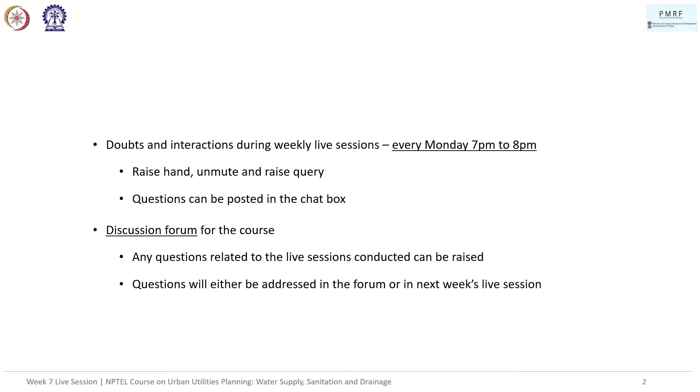So week 7 primarily dealt with sanitation and drainage fundamentals. Let's have a short recap. The first two lectures focused on the basics of sanitation. We covered concepts like basic terms, key issues, the purpose of sewage collection, conveyance and disposal, sewage treatment and responsibilities, sewage project planning, city sanitation planning, sanitation and health, and data and service prerequisites for starting sanitation planning.

Then the next three lectures went on to sewage systems. We covered on-site sanitation systems primarily, including pour-flush water seal latrines, leach pits, septic tanks, secondary treatment and disposal of effluents, upflow anaerobic filter, aqua privies, package septic tank, advanced systems, septage, and cesspools, chemical toilets, and night soil digesters.

We also covered the basics of decentralized sewage systems, including simplified sewerage, small bore sewer system, shallow sewer system, decentralized wastewater treatment system, normally abbreviated as DEWATS, and secondary treatment and disposal of effluents. We also saw a short introduction about public toilets, community toilets, and slum sanitation.

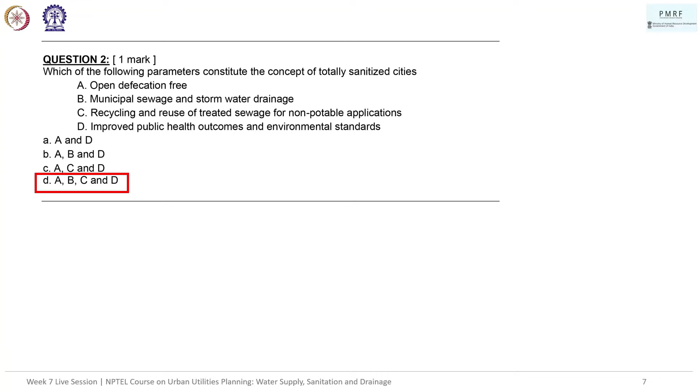So moving on to the next question. This is again almost directly lifted from the slide, if you ask me. Open defecation free cities involve access to safe sanitation and waste disposal facilities for households. So, A disposal, B collection, C management, D treatment.

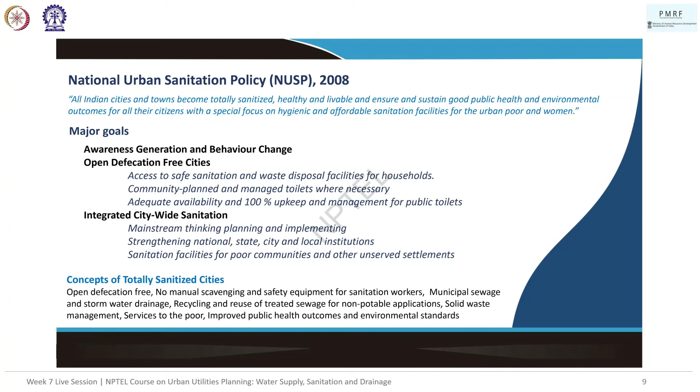Any answers? Okay, we have one answer in the chat box. A, disposal. Correct, so you are absolutely right, Mr. Ashwin. So open defecation free cities are actually focused on access to safe sanitation and waste disposal facility. So particularly focused on disposal, right?

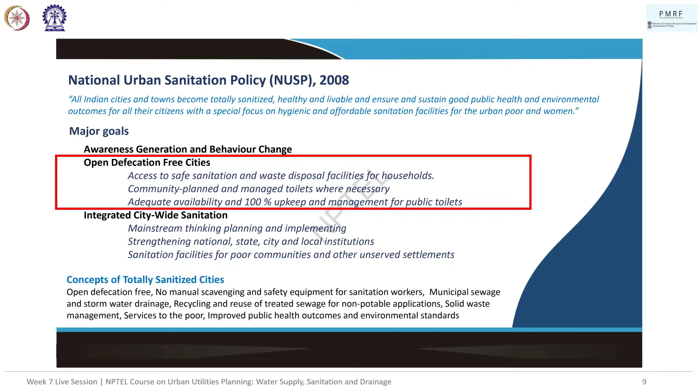Because essentially open defecation happens because of two things. One, not just the access part, but also the lack of disposal facilities at the household level. I know of households next to my own house who choose to open defecate if possible, which is quite sad. We live near the coast, and they do it only because they don't want their septic tanks filled. If the septic tank fills up, the collection means you'll have to pay for the sewage tanker that is coming in. Therefore, just because they can't dispose of the waste from their septic tanks, they actually choose to open defecate at least partially. So therefore, that is why this component of disposal is particularly added at the household level, right? So that's our answer, A, disposal.

Any questions, any queries? I hope not. These are directly from the slides.

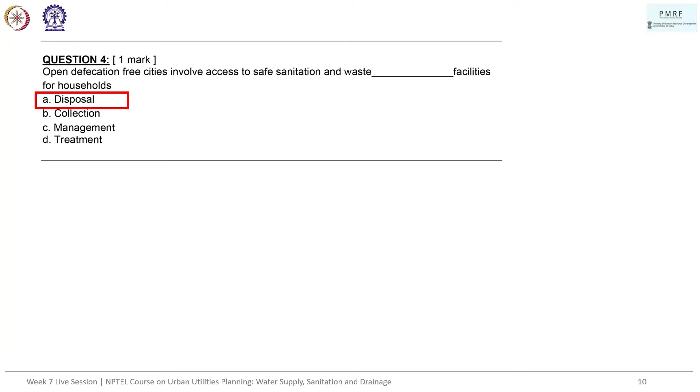All right, moving on. Match the following organizations with its responsibility concerning sewerage and sewage treatment. These are also actually given directly in the slide. If you notice, the Ministry of Housing and Urban Affairs essentially formulates policies and provides technical assistance to the states and ULBs. So, originally, sanitation does not come under the central list.

If you remember, we spoke about the three lists, central, state, and concurrent lists, which are part of the constitution. After the 74th Amendment Act, it has primarily become the purview of local bodies, especially when it comes to urban sanitation. Rural sanitation is still probably under the wing of states, because rural sanitation is a very localized problem. But centralization of sanitation at the city level is something that is very much required. Therefore, urban local bodies have been heavily involved in the execution or the implementation part of sanitation policies.

The formulation of these policies and the provision of technical assistance comes from the Ministry of Housing and Urban Affairs, which is part of the Government of India.

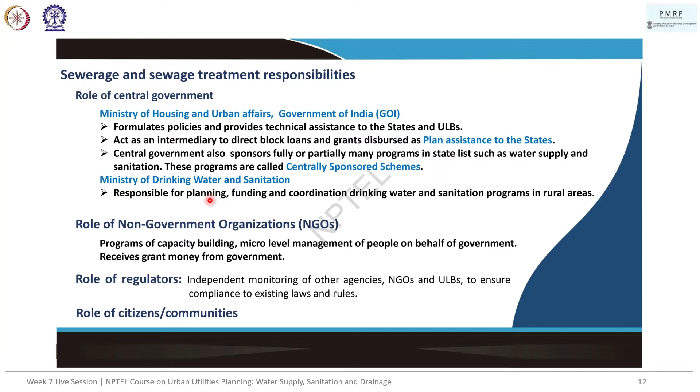Regulators are essentially independent monitoring agencies that look over other agencies, NGOs, and urban local bodies. They act as neutral and unbiased estimators of implementation of sanitation plans, so they basically look after compliance to existing laws and rules. Matching all of these, we get option A.

When it comes to NGOs, there are an extremely high number who actually work on sanitation and access to sanitation. There are very particular niche areas also being addressed. For example, there is this organization, Right to Pee, in Mumbai.

I got to meet one of their key members. Their focus is all on ensuring sanitary facilities are available for women in slums. So such niche areas are also being taken up by non-government organizations. Collectively, all kinds of issues are hopefully addressed.

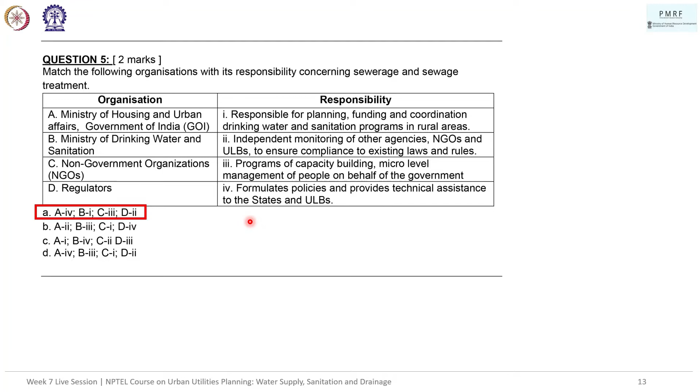Next question: the infiltration area required for infiltration of the waste liquids in the leach pit is given by what? Options are: total flow in pit every hour divided by infiltration rate; total flow in pit every day divided by infiltration rate; total flow in pit every hour divided by sludge accumulation rate; and total flow in pit every day divided by sludge accumulation rate. Any answers?

It's B. Okay, anybody else? One more answer, yes, B. The answer is actually B.

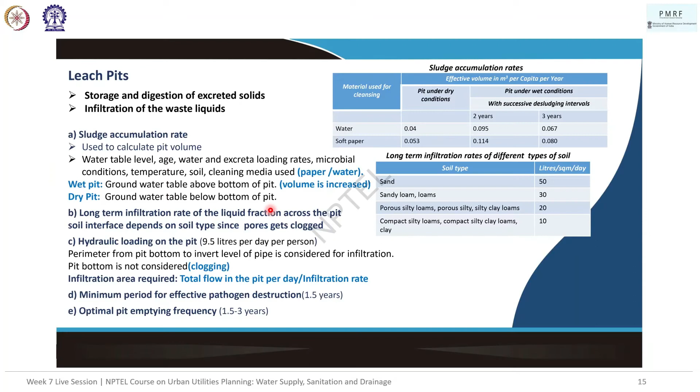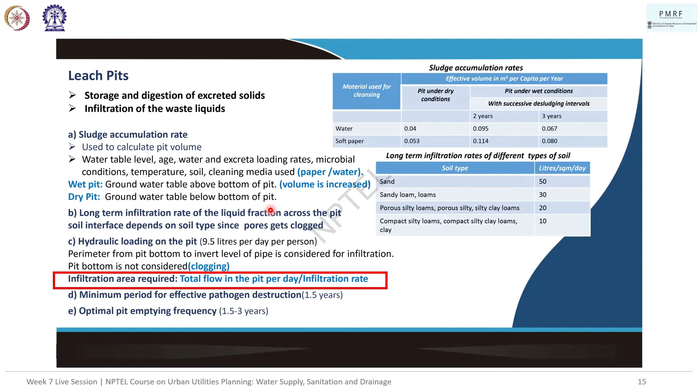If you remember from the slides, the infiltration area required when we're talking about leach pits is the total flow in the pit per day divided by infiltration rate. So the answer is B.

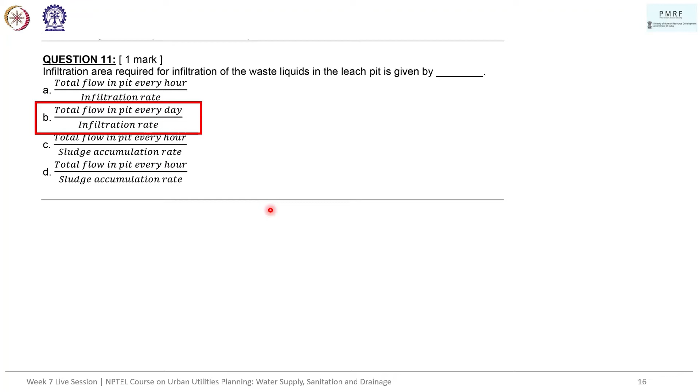Please note that in the previous answer keys that have been uploaded, the answer is given as A, and that's actually wrong, probably a typo. It's total flow in the pit every day, not every hour. Just to clarify on that mistake in the previous assignment, I believe corrected versions are available for download to you. All right, moving on to the next question.

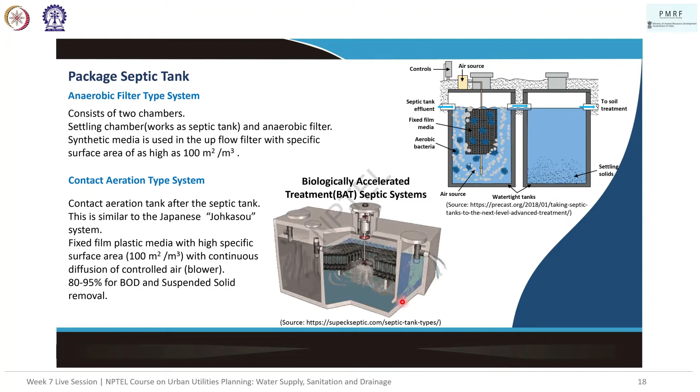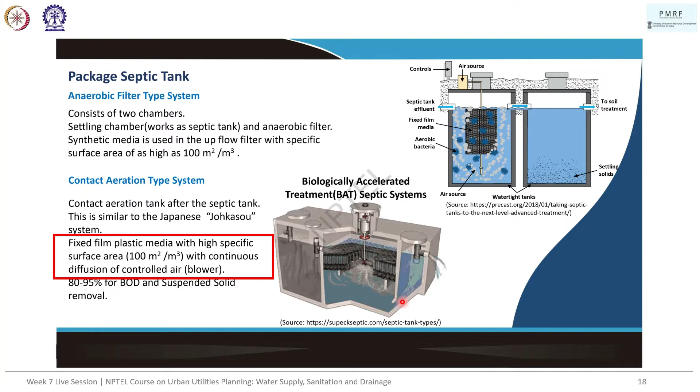We'll take a quick look at the slides as well. The packaged septic tank is mentioned, the slide shows how the contact aeration type system actually uses fixed film plastic media with high specific surface area, usually 100 meter square per meter cube of volume of the system, with continuous diffusion of controlled air to aerate the sewage. We also have aqua privies.

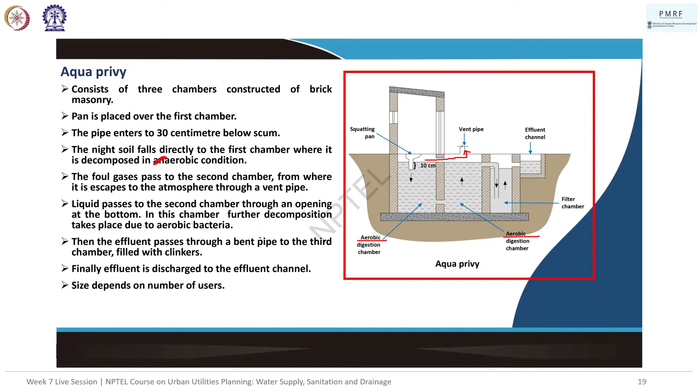There is another small issue here: the night soil falls directly to the first chamber where it is decomposed, but it's actually aerobic condition, not anaerobic. Both chambers are aerobic. There is a vent present, so it cannot be an anaerobic condition, since anaerobic chambers are essentially sealed off in all directions. So both of them are aerobic digesters, as is clear from the diagram, which shows double aerobic digestion chambers followed by a filter.

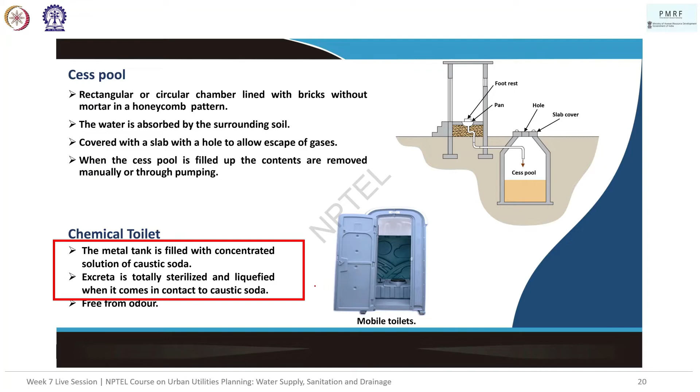For chemical toilets, we essentially have a concentrated solution of caustic soda, and the excreta is sterilized and liquefied when it comes in contact with caustic soda. In the upflow anaerobic filter, we are talking about a multi-chamber system with multiple chambers where water flows through for further filtration—essentially a fixed bed biological reactor. So the answer is B.

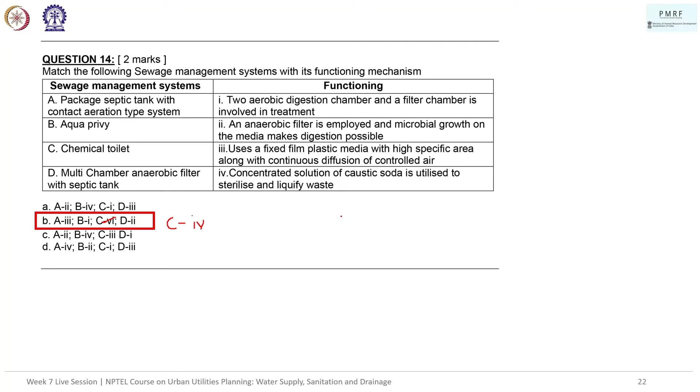So let's take a look at this. If you remember in the first slide, it actually mentions this Japanese Johkasou system. So let's take a very brief look at this Johkasou system.

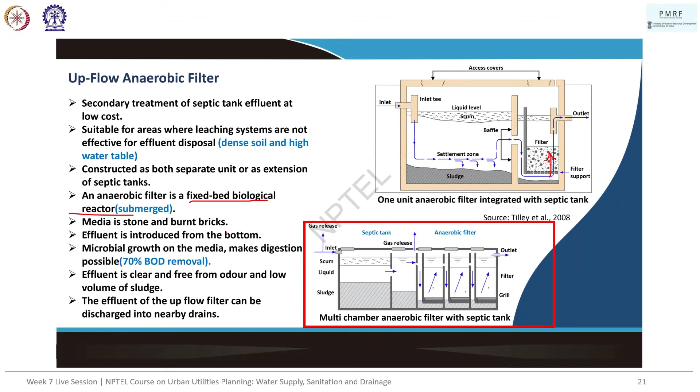This is from a particular company's website. The company is Kubota. This system is a Japanese decentralized or on-site water treatment system. The claim is that a normal regular septic tank, available in many buildings and houses, has lower treatment performance compared to the Johkasou. We can expect almost 50% removal of BOD and other contaminants.

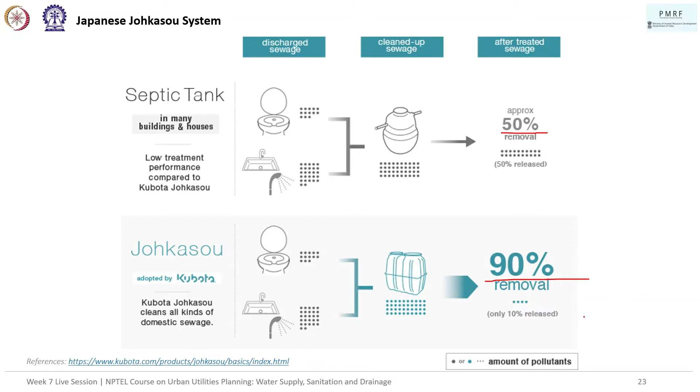However, in the Johkasou system, the claim is 90% removal, especially of BOD. BOD is our highest issue, that's the organic content in the sewage. So these are some of the options that you have.

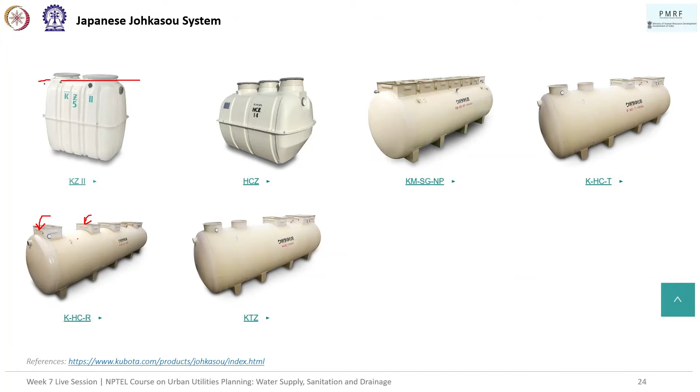You can see they are available in different sizes. This part is what is going to be above the ground, while everything else will be submerged. So you can see a typical cross section. I'm not going to go into the details, but it's one unit with multiple chambers. So this is a small size Johkasou system, middle size, and large sized one.

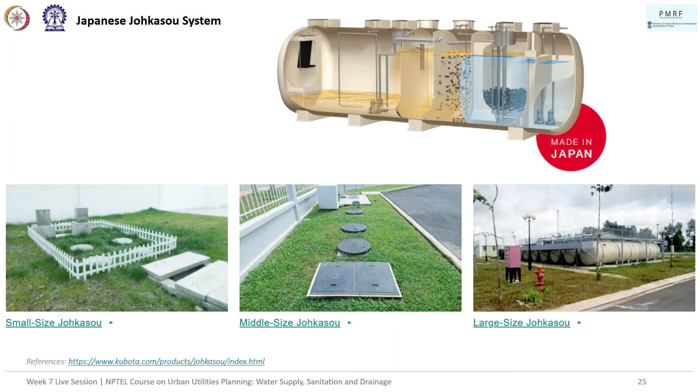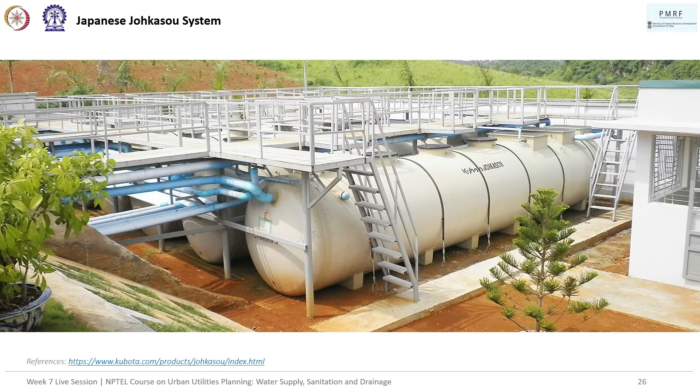The large sized one is actually pretty huge if you look at it. This is an example of the large size system. You can access them from above. There's a very detailed set of access ways providing pathways to access these openings.

So they're basically considered very compact and efficient. In fact, the large sized ones are popularly employed in hospitals, especially because hospital waste has its own complications, and it's preferred that you isolate the treatment of effluents coming from hospitals because of the high disease burden, etc. So these systems come in very handy to handle such situations.

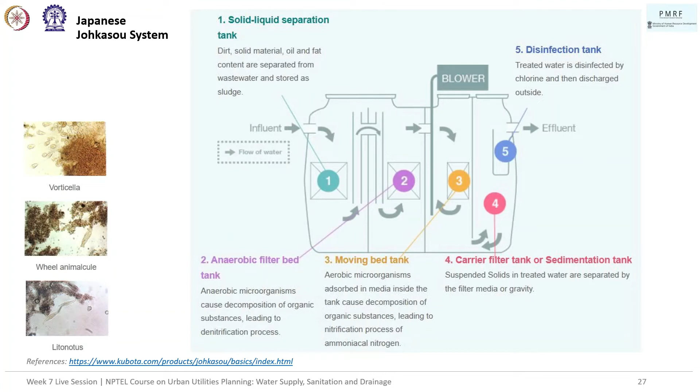You also have these water treatment plants required for small units such as offices or hostels in hilly areas. These areas can efficiently employ the Japanese Johkasou system because it basically comes as one package. However, the major disadvantage is the requirement of high maintenance. Operation is also not that easy, you need to closely monitor the functioning of the system to make sure it's functioning smoothly. So that's a small introduction on Johkasou systems.

Moving on to the next question. Which of the following statements is/are false for a decentralized sewerage system? A: It is suitable for low density communities and where STP capacity is limited. B: It is suitable for low density communities and provides localized water reuse opportunities. C: It is suitable where STP capacity is limited but targeted treatment for specific sewage constituents is not possible. D: It is suitable where STP capacity can be expanded and targeted treatment for specific sewage constituents is possible. So which of these statements is false? Any answers?

I guess A, C, D is wrong. Only B is correct. Which one is correct? B is correct, B for Bombay. All other three are wrong. False. Any other answers?

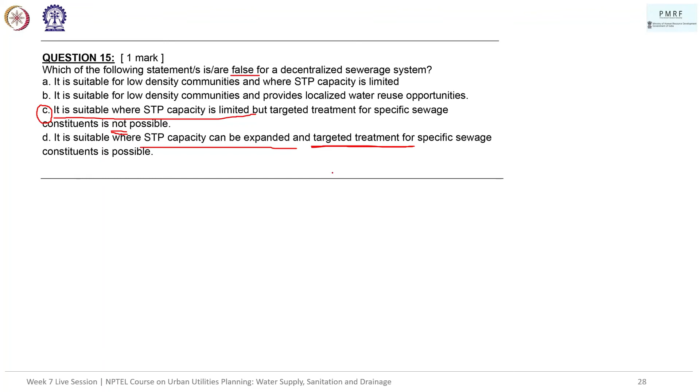But the fourth option that we have is: it is suitable where STP capacity can be expanded and targeted treatment for specific sewage constituents is possible. Here it makes sense because even though STP capacity can be expanded, you can use the existing STP. However, we can resort to targeted treatment for a particular type of sewage that is coming off. So then yes, decentralized sewerage system makes sense.

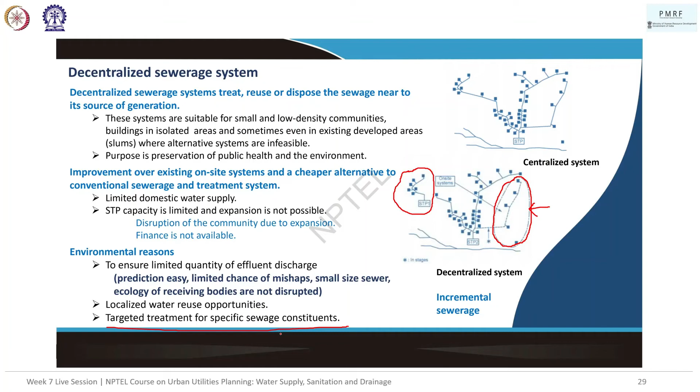So which is also mentioned in the slide actually, when targeted treatment for specific sewage constituents is possible. For example, like I mentioned, hospitals - even though the regular STP can handle it, if we can isolate hospital sewage, it's better. It is targeted treatment at the end of the day. Or even in case of fecal sludge management.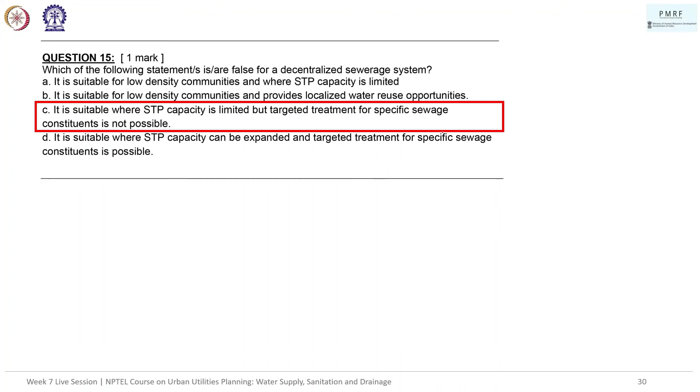So the answer for this question is C, but yes, the wording is mildly ambiguous, and again, I will bring it to the attention of the team. That being said, I would also like to bring to your notice this...

Fecal sludge and septage management in India - there's a website under the Swachh Bharat mission. So we actually have a fecal sludge management policy. One second.

National Policy on Fecal Sludge and Septage Management (FSSM) is a document that was released by the Government of India by the Ministry of Urban Development in February 2017. So they talk about the various systems like the private pit, etc.

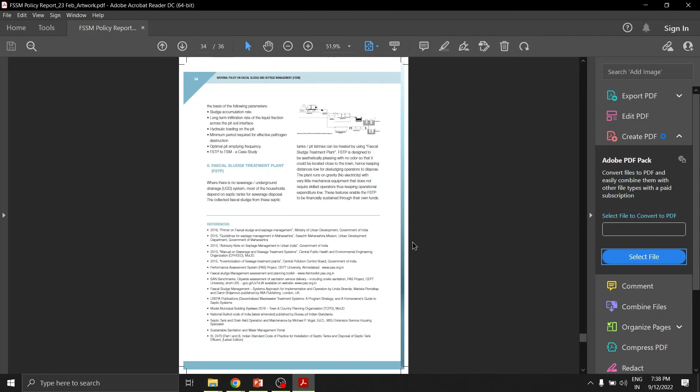You can see it here: septic tank with drain field, septic tank with soak pit. They do talk about all the technological options, but it is essentially a policy document, which is not a mandatory document but more of a guidance document on fecal sludge and septage management in India.

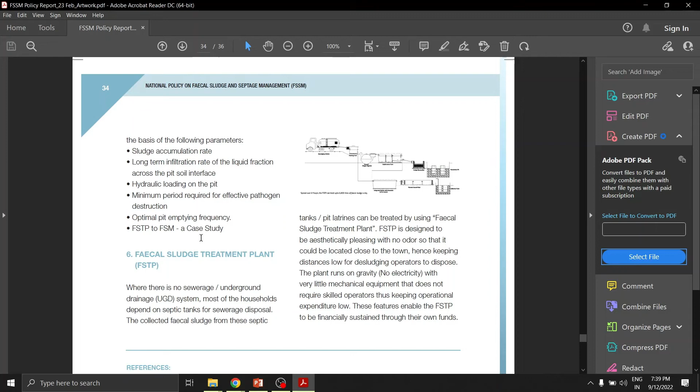So they even talk about a separate fecal sludge treatment plant, which is an example of targeted treatment. Usually, fecal sludge management is a problem because the septic tankers that come and collect fecal sludge essentially go and release it in some water body, some river, etc., which is where the issue arises.

So let's look at the small numerical that was part of the previous assignment. This is very similar to the current assignment, but I would take it up since it's available. What is the minimum number of dispersion trenches to be provided if the area required for dispersion trench is 90 meters square? Consider the width of the dispersion trench as 1 meter.

Does anybody remember the maximum length of a dispersion trench that we can have? 30 meters, so it will be C3. Yeah, you've gone ahead and solved the problem now. Yes, that's the answer actually.

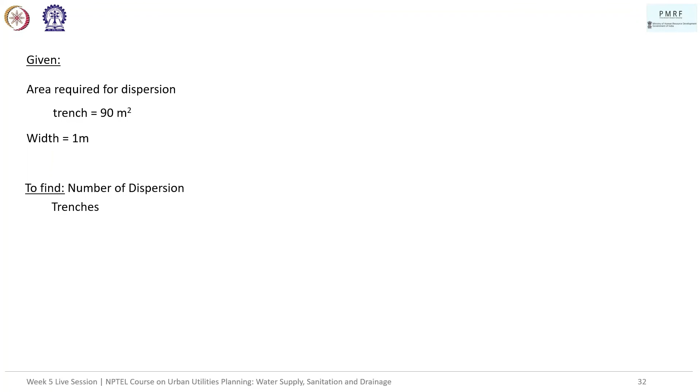So we require an area of 90 meters square for dispersion and the width is 1 meter. We need to find the number of dispersion trenches. The maximum length of dispersion trench permitted is 30 meters. First we calculate the total length of the trench, which will be area divided by width of trench. In this case, it is 90 divided by 1, which gives us 90 meters of total length. The number of trenches will be total length divided by maximum length.

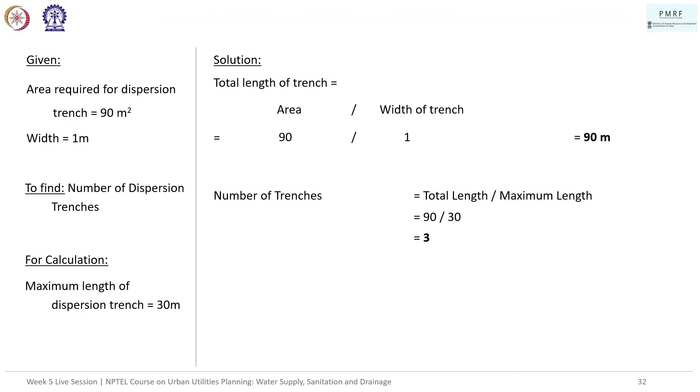90... the unit is wrong. No, the unit is fine, right? Yeah. So 90 divided by 30, that gives us 3. And that's our answer, 3 trenches.

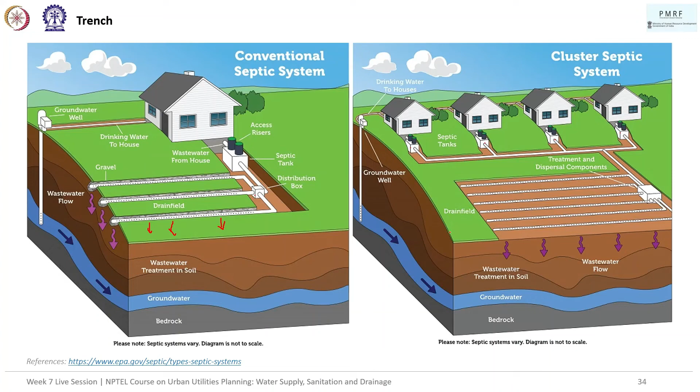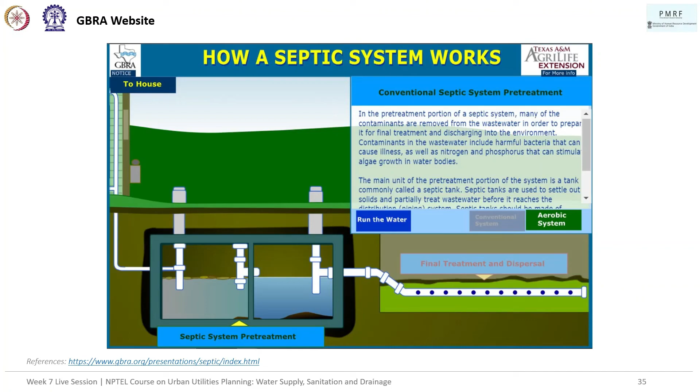So we have this GBRA website, which is a US based website. It might have been designed originally for a younger audience, but I think it helps us visualize the entire process of generation.

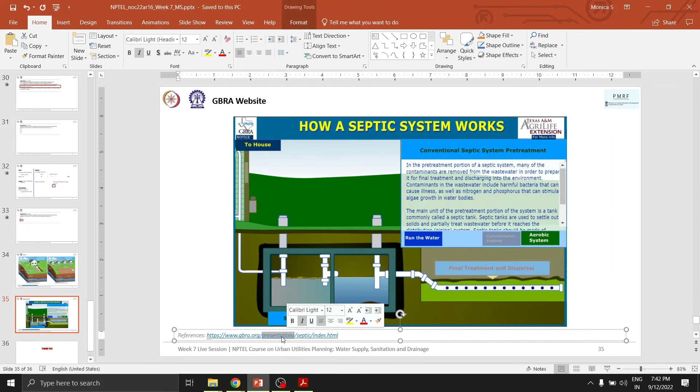While it loads, this is one decentralized wastewater treatment system that I'm familiar with, at AAETI at Nimli, which is the educational wing of the Center for Science and Environment. They have a very detailed decentralized water treatment system, called DWWTS, which covers a span of 10 acres. If you ever get the chance to visit the campus, it's a little remotely located, but they have a beautiful demonstration.

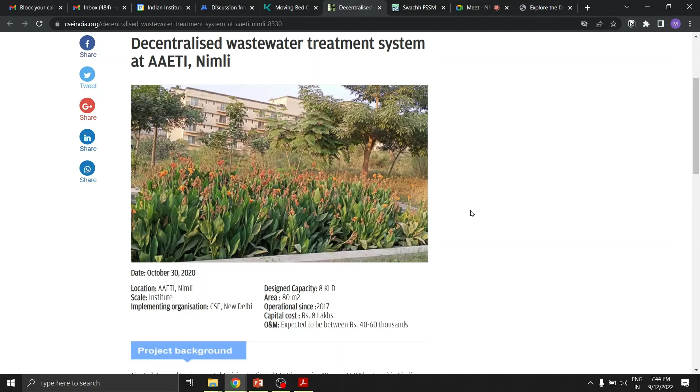It's not just a matter of installing the system, you also have the system almost functioning, with an entire topography where the system functioning is visible. Another recommendation I have for understanding any sanitation or water treatment system is to go and, if you have access, visit a facility, a water treatment plant or a sewage facility. I had the opportunity to visit the one in Trichy as part of an IHS workshop, and that understanding carries me through even now. It's actually beautiful how much your brain can retain when you encounter such systems in person.

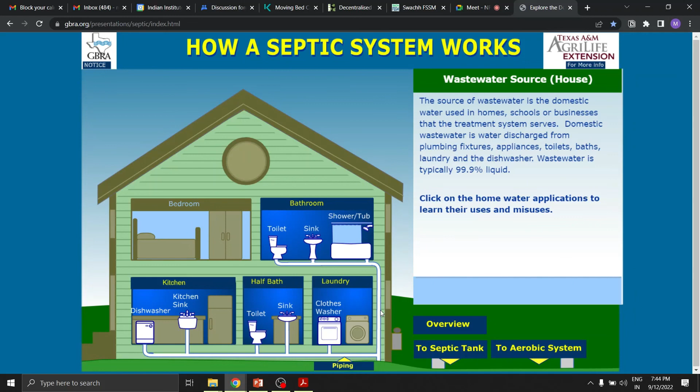Okay, so this is how the system essentially works. Is it visible on the screen? Yes, it is visible. So you can play around a little. It might be a little juvenile, but this is the house, and then you go to the septic tank and run the water and see how it functions. And this is the trench system they're showing here.

The trench continuously works, not such an up and down system. They're just trying to show that it changes. You can use this website to understand, or show it if you are an educator and want to show it to someone else. I found it very useful.

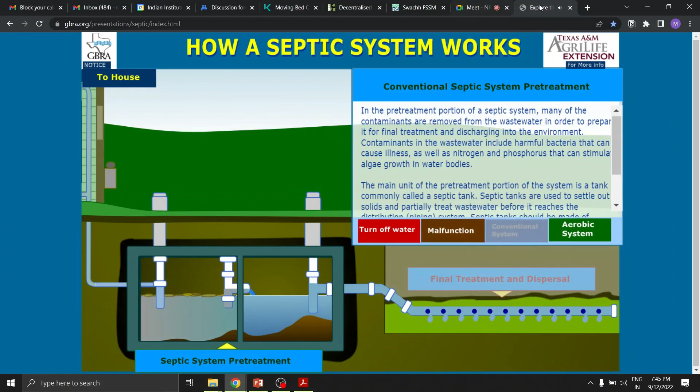So yeah, that's all for the week. There are a few other resources like the shit flow diagram and stuff, but I think we'll look at it as part of next week, because by then I'm hopeful we'll be done with the centralized or conventional sewerage system. So thank you all.